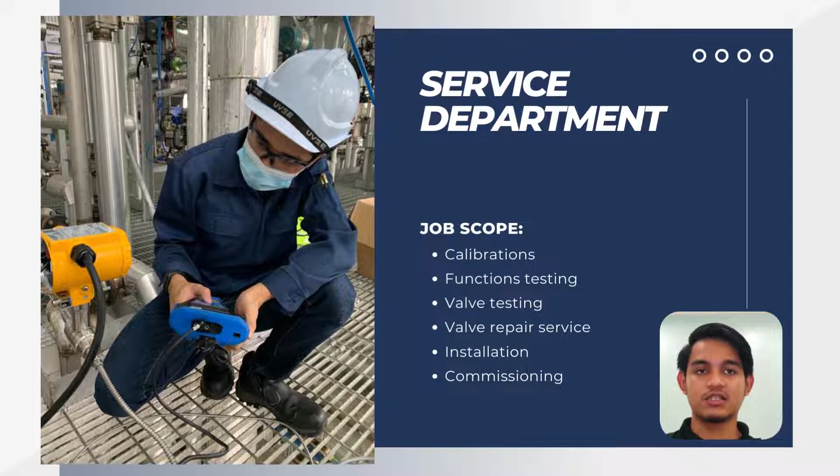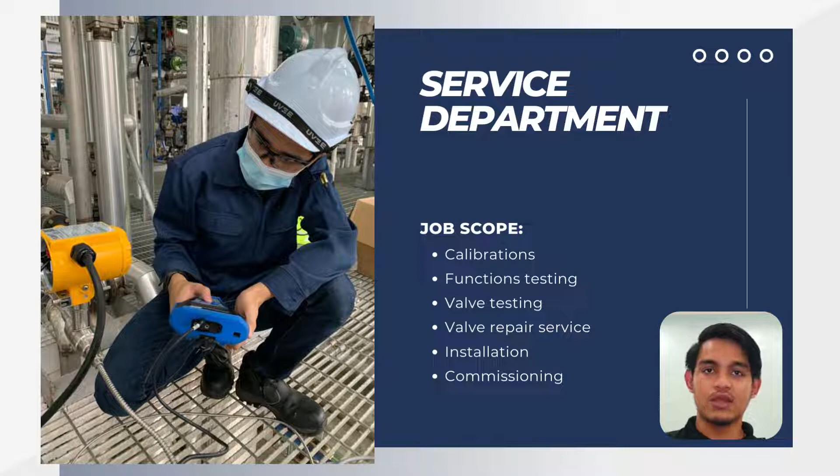Now at PIC Engineering, I was located at the Service Department as Engineering Service Intern. My main job that I learned is calibration, function testing, valve service, installation, and commissioning. All these job scopes will be explained on the next slide.

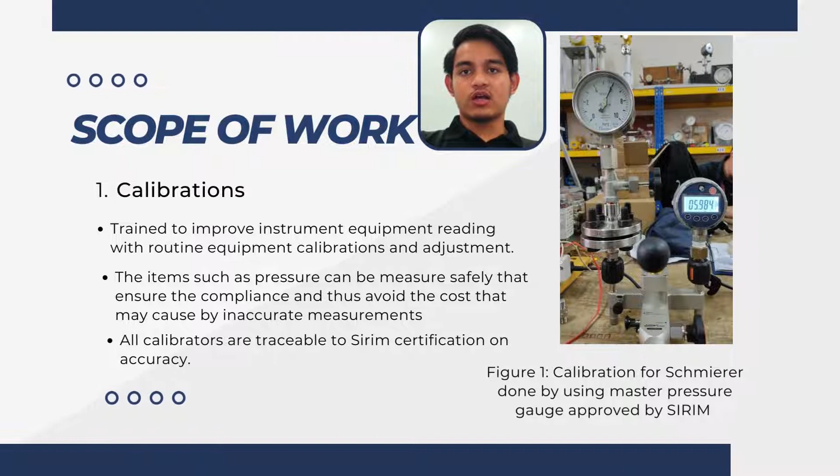The first job scope is calibration. For calibration, we are trained to improve instrument equipment reading with routine equipment calibration and adjustment. Items such as pressure transmitter or pressure gauge can be measured safely so it can ensure compliance and avoid costs that may be caused by inaccurate measurement, for example explosion and leaking. All calibrators are traceable to SIRIM certification on accuracy.

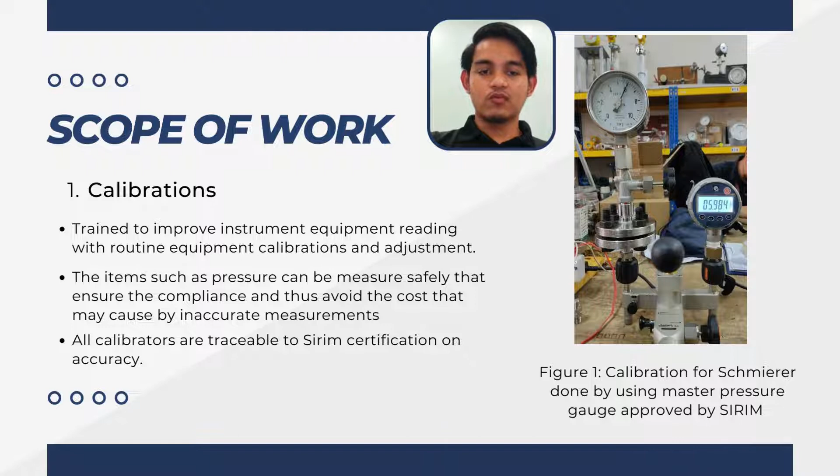Just like this figure 1, the calibration for pressure gauge done by using master pressure gauge approved by SIRIM. For every calibration, there must be important equipment that will be used to calibrate the instrument.

The first one is pneumatic hand pump and master pressure gauge, needed to calibrate instruments that use pressure. The second one is instrumentation multifunction calibrator, known as process meter, to measure, display and control a wide range of process variables such as 4 to 20 milliamp or pulse. Lastly, the master liquid used to calibrate pH and conductivity sensors or other items such as turbidity.

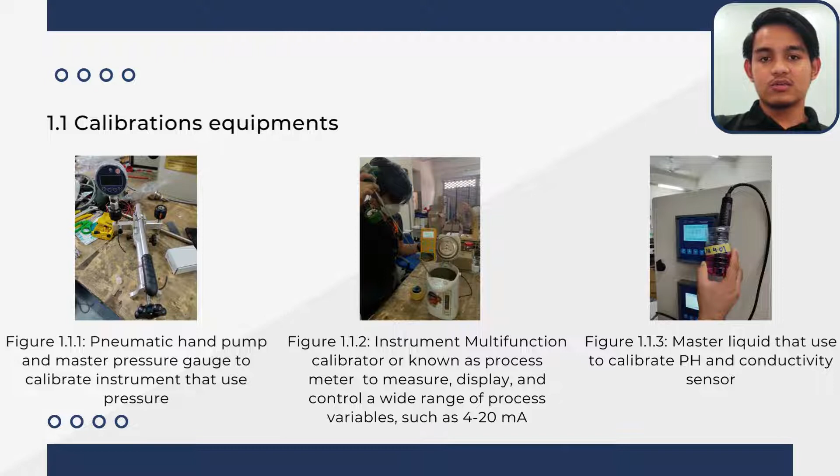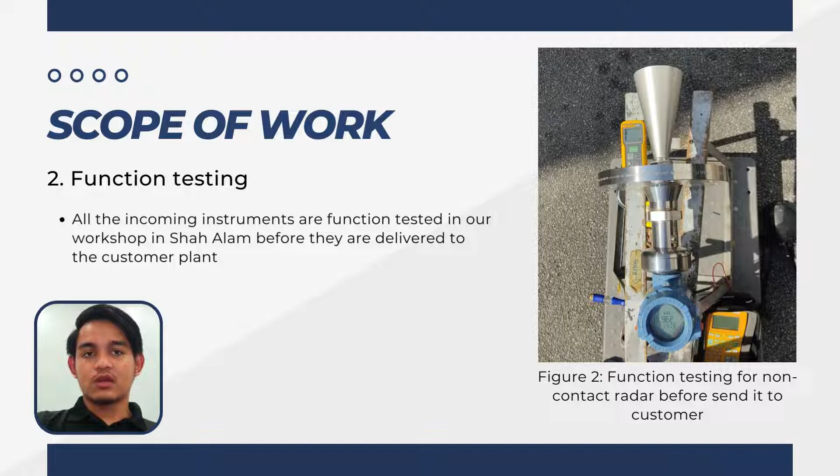The second scope of work is function testing. Function testing needs to be done for all the equipment instruments in our workshop at Shah Alam before they are delivered to the customer plant, to make sure the instrument can be run and used safely and smoothly. Based on the picture, function testing for non-contact radar before sending it to the customer.

Right now for valve testing, valve test can be done on plant site or in our workshop in Shah Alam. A test certificate from DOSH approval will be issued for each item, stating the test result and condition.

For safety and relief valve test, there are two types of tests. The first one is pop test, to ensure that the pressure is released at the set point pressure. The second test is bubble test, to ensure that the body can sustain a certain pressure without any leakage. Based on figure 3, bubble test at the EFCO vertical test bench to measure the leakage at the pressure relief valve.

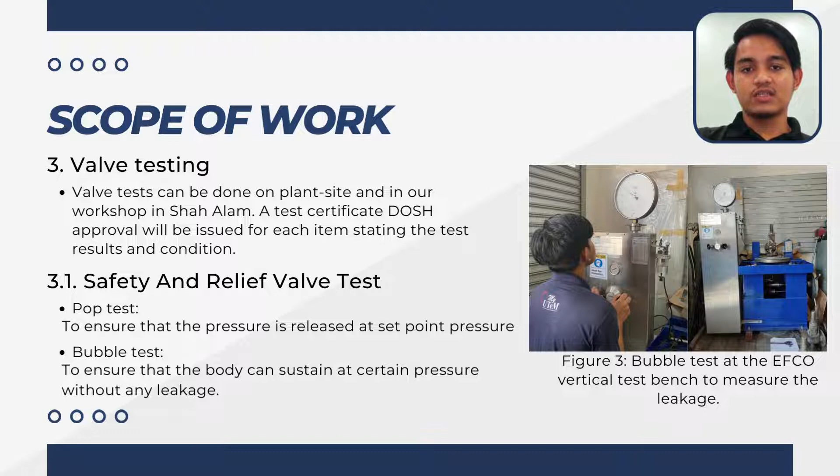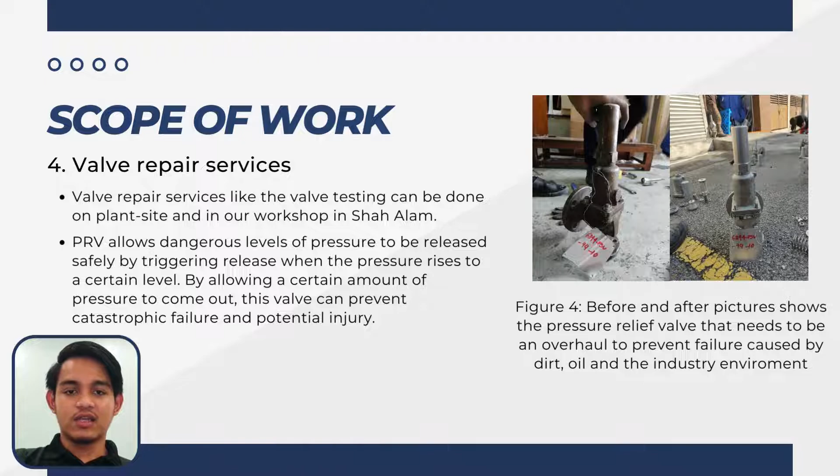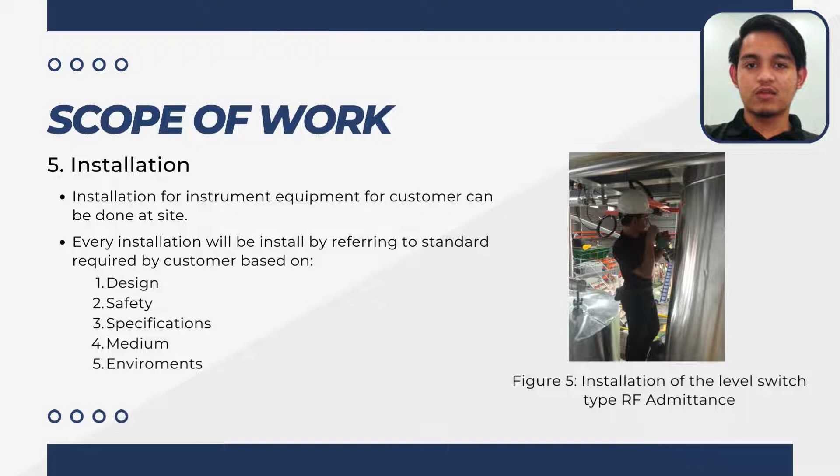Number 5 is installation. Installation for instrument equipment for customer can be done at site. Every installation will be installed by referring to standards required by customer based on design, safety, specification, medium, and environment to be installed. As figure 5, that is me doing an installation of the level switch type RF admittance at Wilhelmina Energy Malaysia at Gebeng, Kuantan.

Lastly for commissioning, for the past 16 weeks I was doing commissioning for Wilhelmina Energy Malaysia for their R&D sample plant at Gebeng, Kuantan. Now I will explain about commissioning. Commissioning refers to the activities from the point in the project when construction is complete or equipment is installed, until the equipment is placed into service and handed over to the customer operations team for continued operation and maintenance.

Commissioning at the TG2 Wilhelmina Energy Malaysia sample plant for R&D usage at Gebeng, Kuantan, Pahang. The Wilhelmina is developed by TG2, a company that does renewable energy from biomass. The location for Wilhelmina Energy Malaysia sample plant for R&D is located at Lot 140H Jalan Gebeng 2/1, Kawasan Perindustrian Gebeng, 26080 Kuantan, Pahang. This company focuses on making biomass from empty fruit bunch, especially from palm oil, to export it to Japan using steam explosion technology.